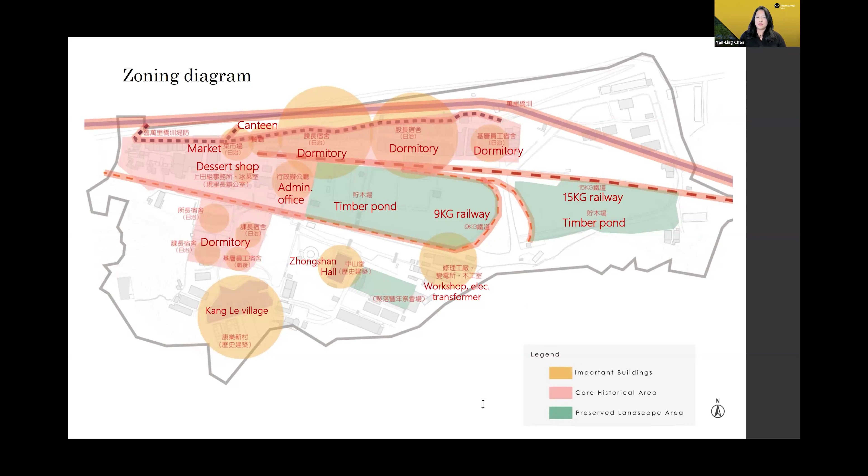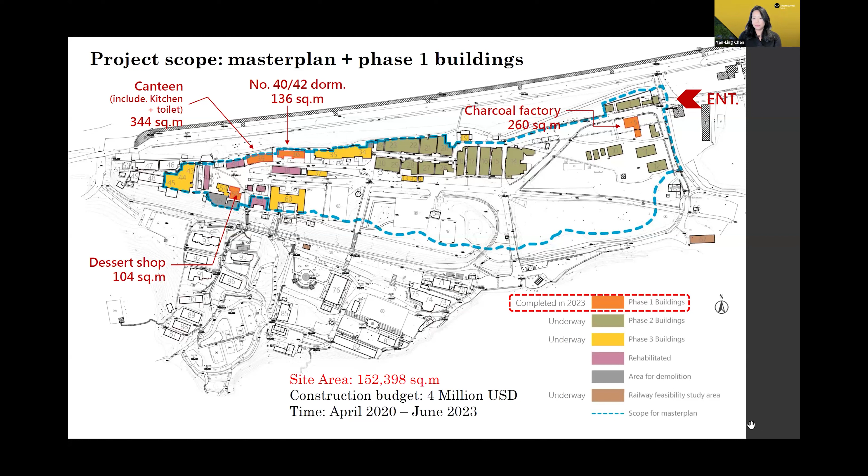The challenges of the project that I would like to talk about: because of the industrial context, the space was not meant to be open to the public. So repurposing and preservation become a really big challenge for us. And then along the execution, of course, there are many challenges that come from the industrial context.

And then the third point, community building, going back to the earlier point about how, because the building is only 100 years old, the legacy should live on, and how we build a community that can actually live with the architecture for a long time. And then in the end, I will touch a little bit on our public project system and why it's so difficult.

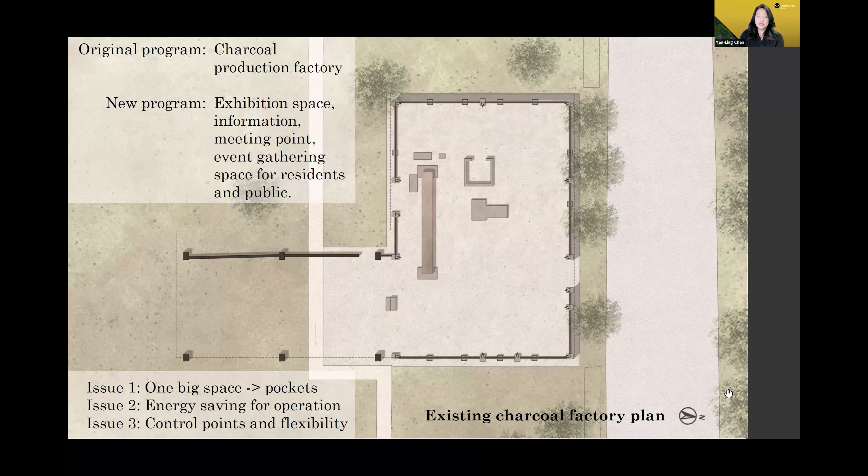And then we will talk about the canteen, with the restriction of the fire code, and how we try to make the new crowd not interfere with the privacy of the existing residents too much. This is the existing charcoal factory plan. So you can see this factory is one big space only for production, but in the new program we have many exhibition spaces, an information meeting point, and an event gathering space for residents and public.

So the issue naturally becomes how we can divide the space so that the spatial flow sequence makes more sense to the public, and how we save energy in such hot weather, since Taiwan has a humid climate and high temperatures. We also need control points to save the artifacts, and flexibility for use.

Diagram A shows the use of the outdoor event space. One is for the public and one potentially for community events, because from talking with the residents, we know they love having gatherings outdoors, talking to neighbors. And from the analysis, you can see that at this entrance a lot of tour buses will drop off, so we need a breakout space here.

And from this point to the next spot is a 5 minute walk. So it's very important, as the first stop of the culture park and a reception space for visitors, what message we would like to give them. Diagram B shows the space requiring AC is actually very small; we don't need such high ceiling or air conditioning. And diagram C shows how we separate this big space into small pockets.

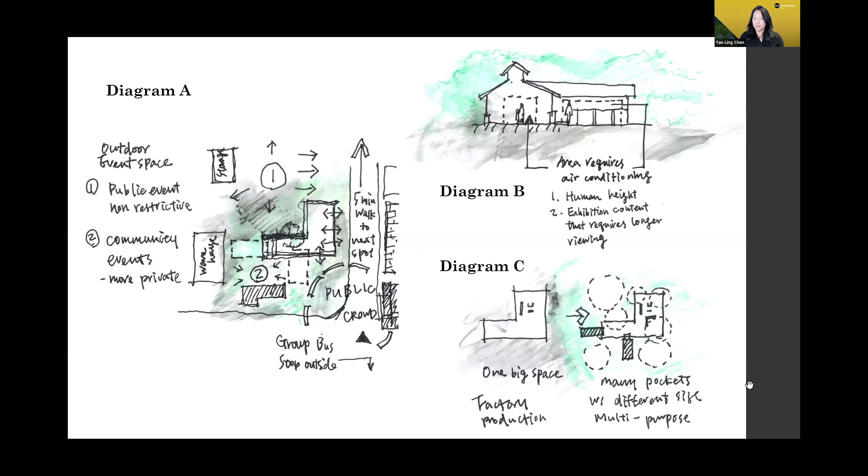Then there's balancing preservation and the new elements for the facade expression. Of course, we want to preserve the expression, the historical context, from the past. So we're using corrugated iron to continue the roughness of the factory. But at the same time, it can't be a closed facade. It has to be more open and friendly for visitors to come inside and get more information.

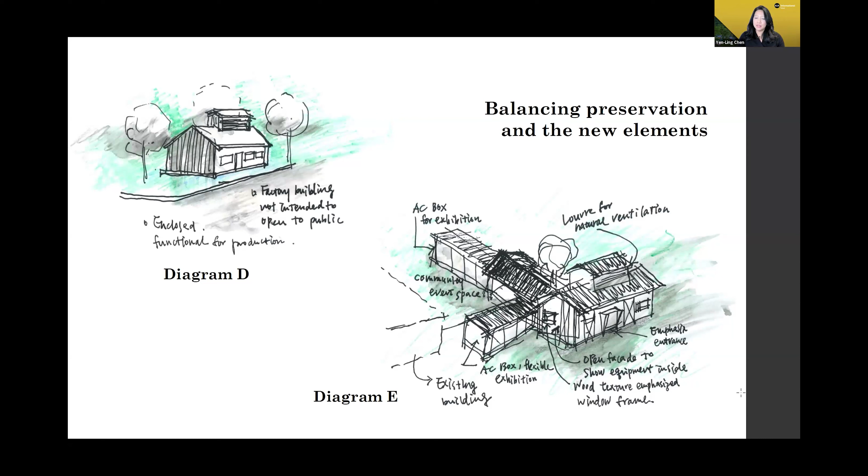And talking about the climate issue, aside from making a small box for the air-conditioned space and the rest being natural ventilation, it's inside the valley, as you can see from the section. So we have to open up a lot of the southwest corner to let natural air come in during summer. The northeast side gets humid, very cold winter air, so we tend to close off that side.

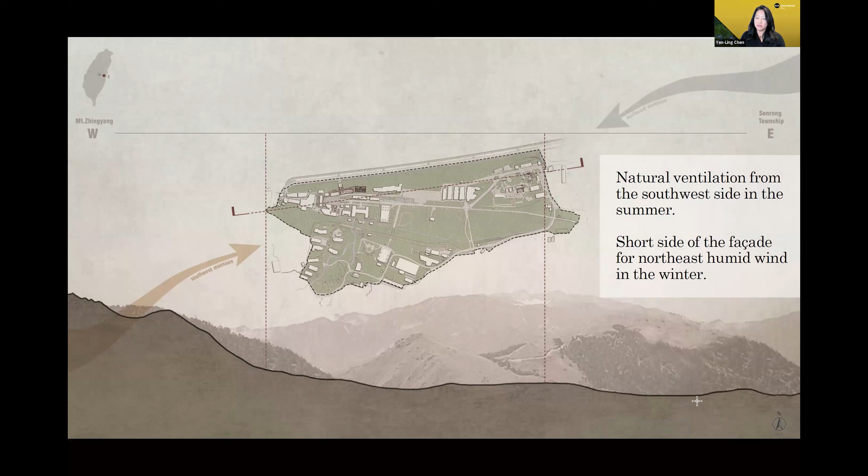And this plan shows the public outdoor space, and these two new boxes we built for exhibition, which you can also lock off for air conditioning, and the tour meeting point around the trees, with a nice summer breeze coming in from the southwest side.

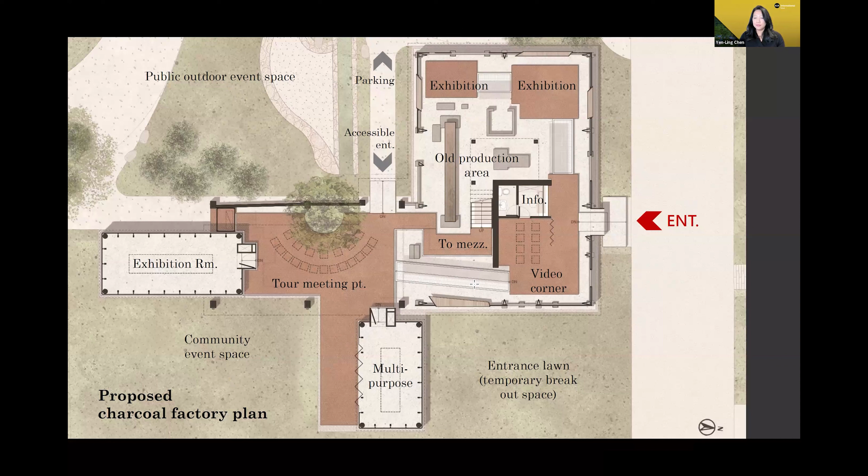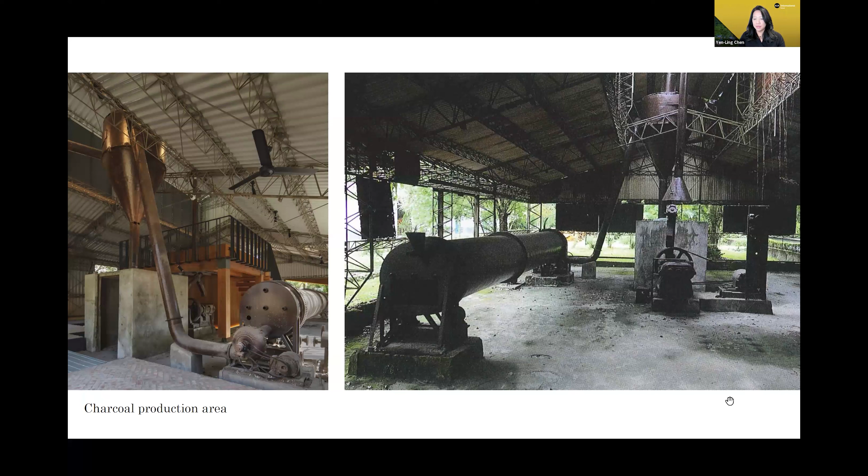Moving on to the canteen building, that's now used as sculpture exhibition space because the kitchen is not allowed inside. So after we've done the structure reinforcement of the existing building, we define and design the necessary facilities for a historical building. That's the kitchen and toilet, so we can pass the heritage historical building review.

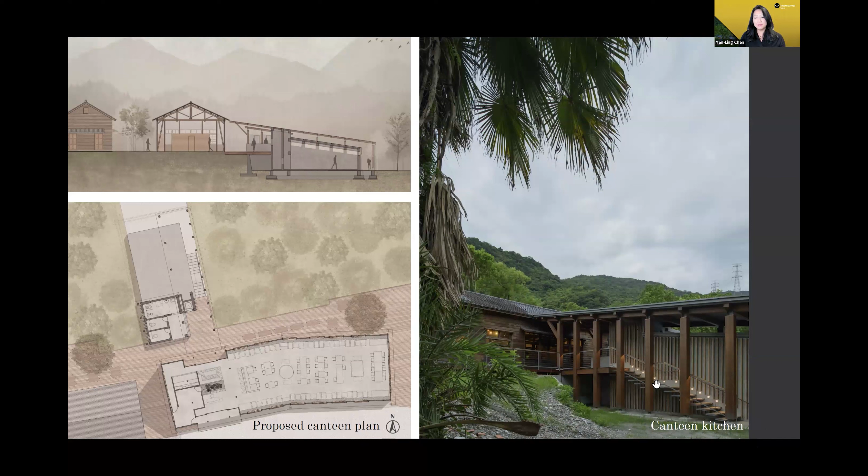And all this is actually provision for external operators. They can quickly come in even in such a remote location. They don't need to do much construction. Many of the necessary major things are ready to use, and it also leaves flexibility for local operation. From the architectural expression, the new building, as you can see from the picture and the section, we are trying to respond to the surrounding mountainscape.

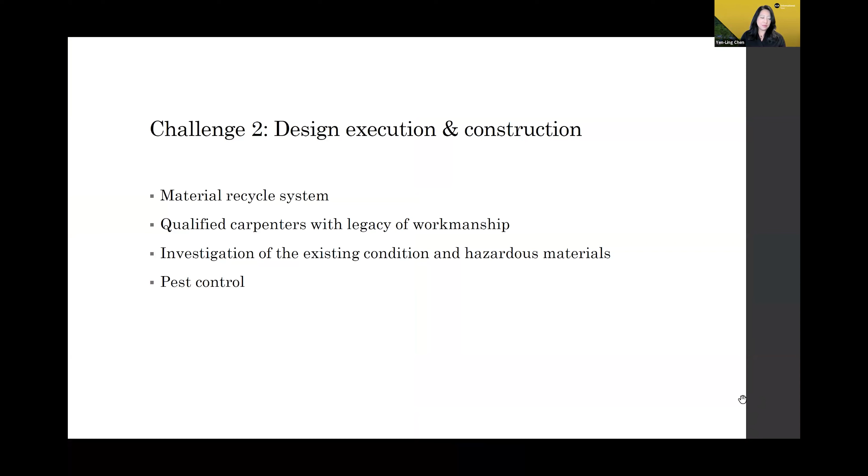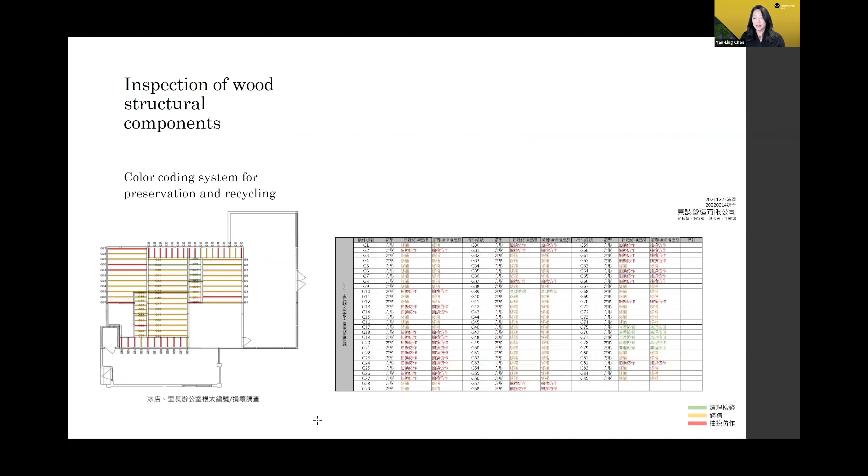Challenge 2 is the design, execution, and construction for material and the legacy of the workmanship. The existing condition, of course, it's an old building. There's asbestos and hazardous material, and we also have to do pest control. This is a diagram showing how we communicate with the builder and carpenter. We mark out the structure components. This is the dessert shop floor joist condition. Green is usable with cleaning, yellow is usable with some repair. Red is non-usable. That's for recycling and processing.

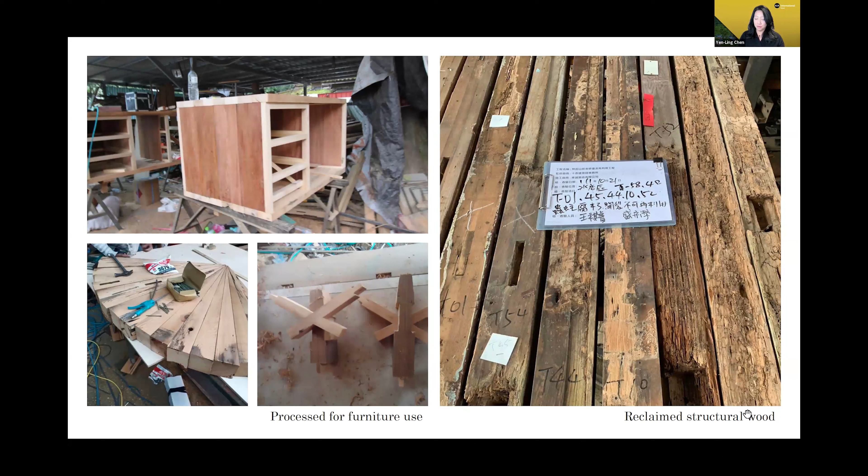On the right-hand side, the image shows the red, non-usable structure components, but they're actually usable as furniture if we clean and process them. So we make certain furniture from recycled wood. And this is the yellow tag, the structure elements that the carpenters, we call them master carpenters, repair. They are from the region, and they have their own way of repairing the structure.

So intentionally in our building, the repaired parts, the new part and the old part, were not painted one color. We intended to show the difference so visitors can catch which part is new and which part is old, and there's a lot of thought put into the local craftsmanship.

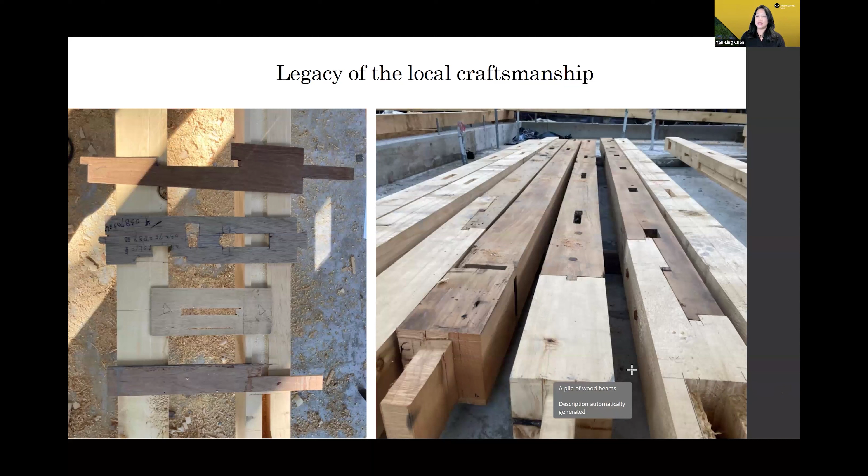Challenge 3, community building. We would like to redefine the sense of place and community, because through conversations with the local residents, they mentioned the dessert shop a lot. It was a gathering place for them back then. They came to the dessert shop a lot and talked a lot. But now there's no logging industry, no forestry industry anymore. So we need to find something that can root in this community, for the residents to live with. So exploring the regional culture is a big part.

And then quickly touching on the historical significance. The individual building here doesn't have much historical value. It's valuable only with the group of buildings. So it's more flexible for us to modify an individual building, but in the context of the industrial site. For example, the railway or the factory, the core significance of the site has to be preserved as the context.

And we talked to the residents about how they want to pass on the culture of the past, having the intangible cultural heritage of the forestry logging culture more emphasized on site. So our goal is to have architecture that's not just a physical building, but more a member of the community that tells the story.

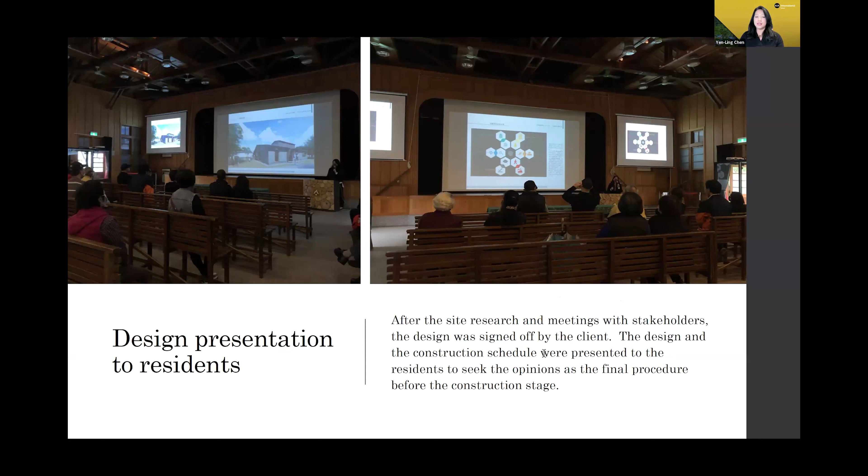This is a design presentation made to the residents after the design was signed off by the client. We went to the village chief's office and talked about what they want to preserve when we turn it into a dessert shop. So we preserved this contrast of the structure, and we took from the picture of the dessert shop the small chairs and tables they can have a dessert on.

These furniture elements are reclaimed wood from the structure. So the people in this village know this is coming from part of the old structure. We intentionally leave a lot of traces the village residents can talk about. We found a local artist in the village. He was born and lives in the village and has an indigenous cultural background. And we also collaborated with the president of the Community Development Association.

We sat together with the master carpenter and builder to make something that can pass on the stories from what we recycle and reclaim from the structure. In the end, we decided to leave a feature of the structure component, which you can see in one of the table legs. And they have this burned wood surface, an indigenous element in the village that they want to pass on. And also the structure carpenter's way of fixing the new and old wood, which has to be carried on.

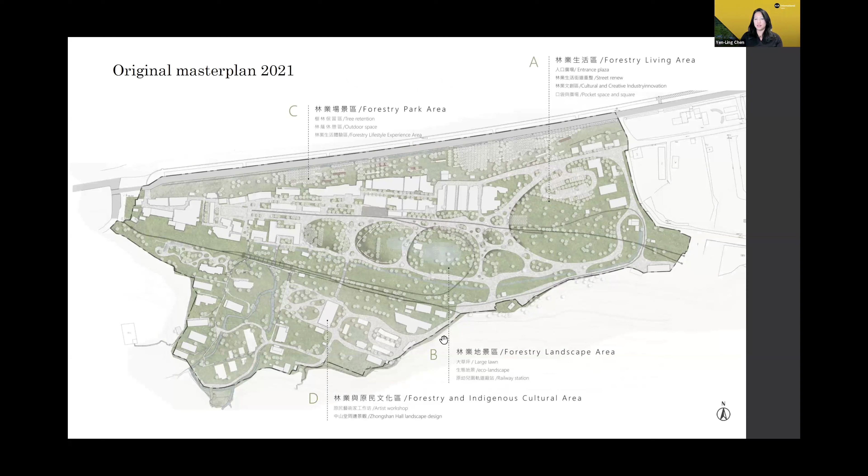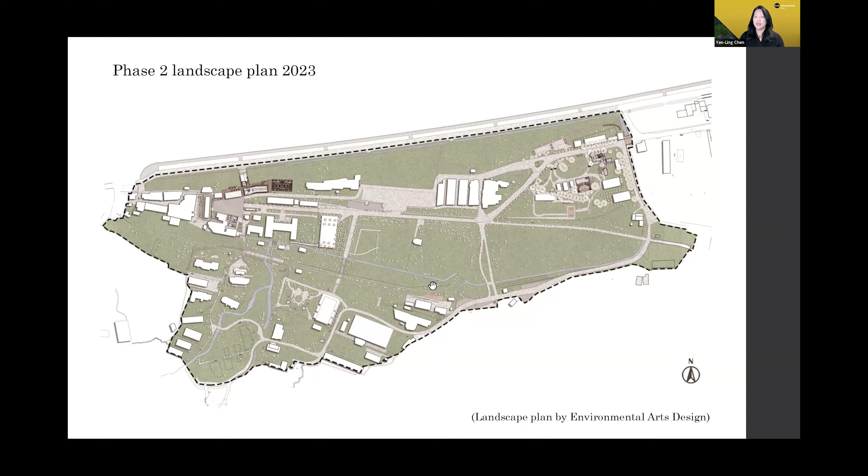So this is the master plan done in 2021. As you can see from the landscape, we tried to preserve this pond, the timber pond here. And then because of the budget, it has to be phased in 2, 3 stages. And then when the plan was tendered out to other designers, the lack of budget made it very difficult to follow the original master plan. So as you can see, the context of that plan is gone. So that's how I quickly touched on the challenges.